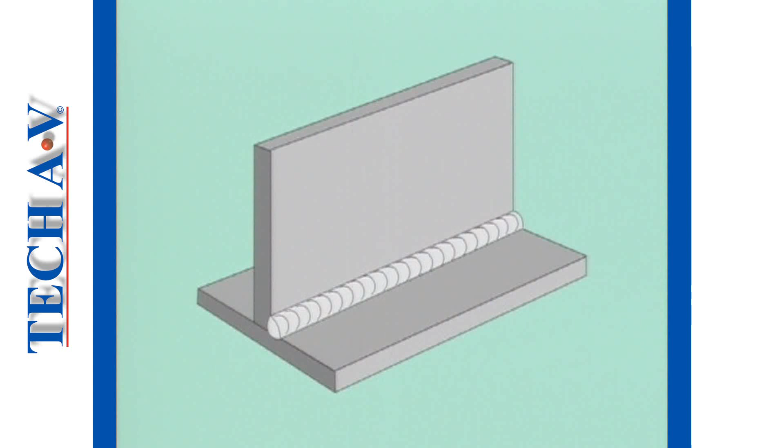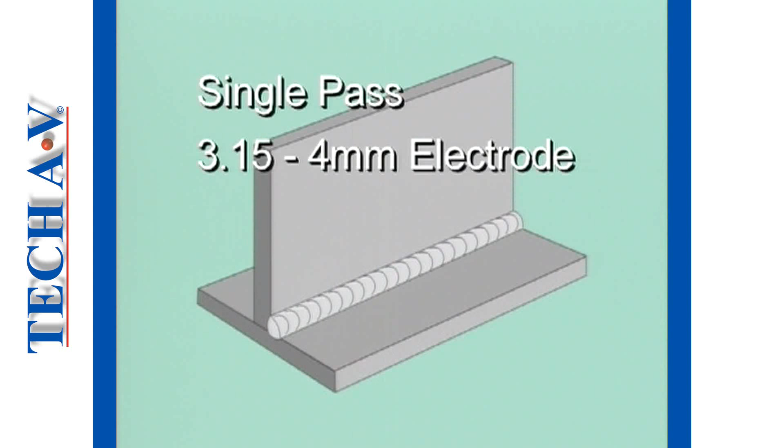In this, the final exercise, we will demonstrate and explain the process of welding a T-joint. A T-joint is made using a fillet weld technique. Owing to the metal thickness, 6 mm, we will require only one pass along the joint with a 3.15 or a 4 mm electrode. The criteria being that the weld face width must be at least 6 mm.

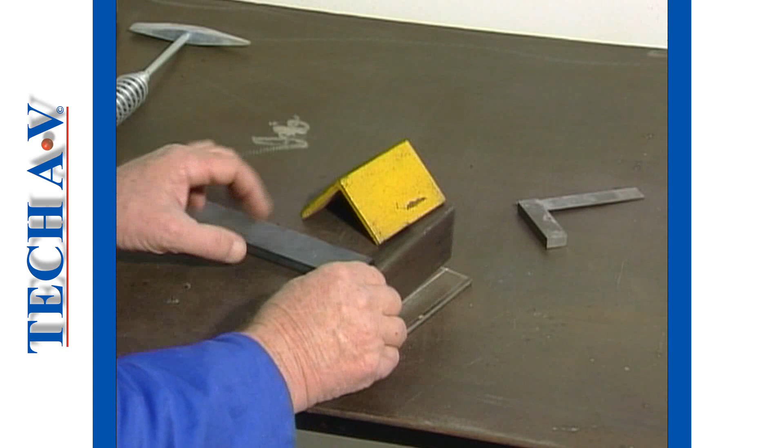The first step in our process is to set up the work and to tack the pieces into position. Any suitable method of supporting the plates may be used in order to hold them in position for the tacking procedure.

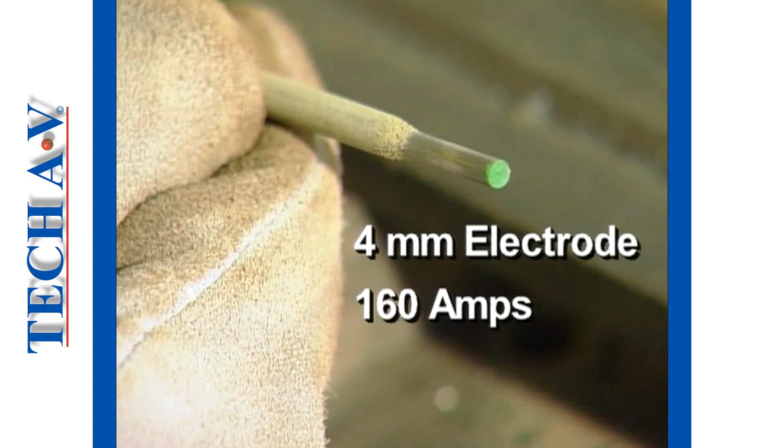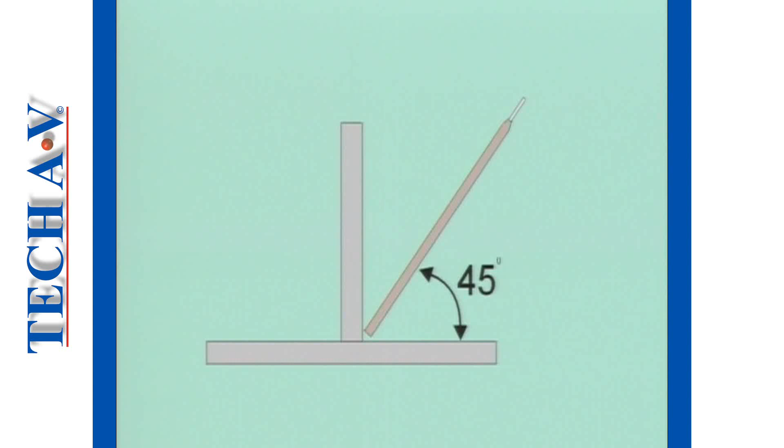For demonstration purposes, we have selected a 4 mm electrode, and the welding current required for this is 160 amps. The electrode should be introduced into the fillet at an angle of 45 degrees, as viewed from the end, and at a 45-degree angle in the direction of travel. A single tack is first made in one corner of the joint.

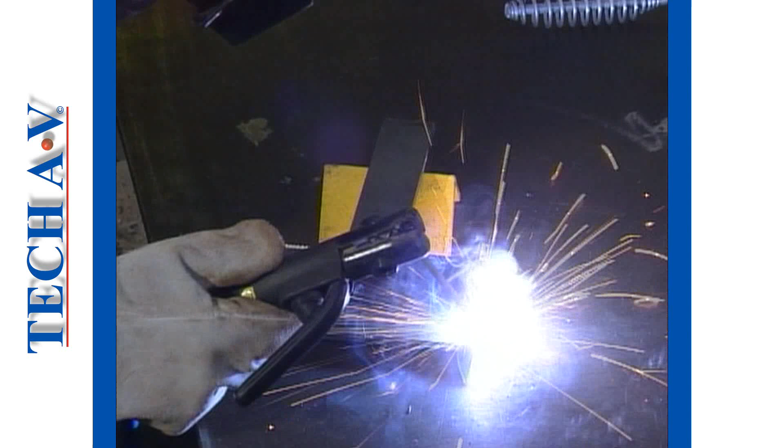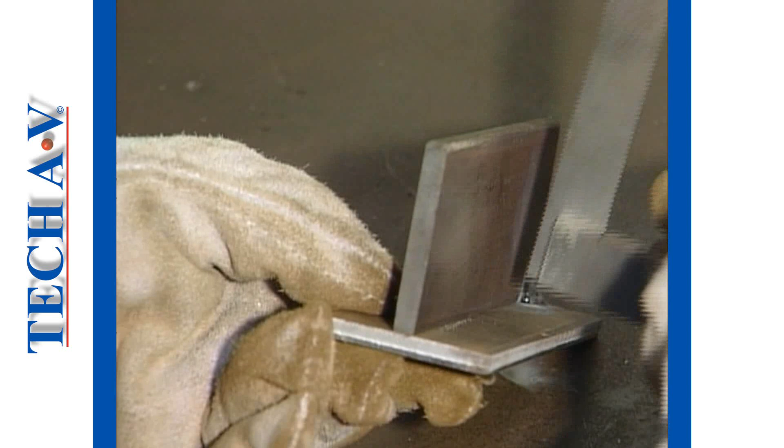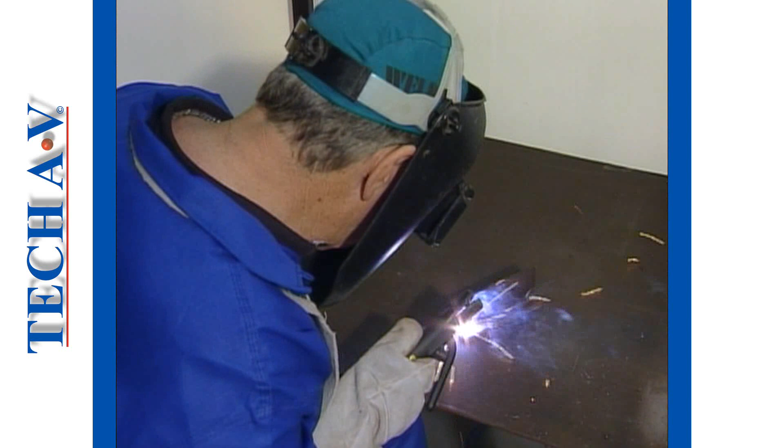Next, we must check that the upright leg is at right angles to the base, and, if not, make any necessary adjustment to bring the leg square. The second tack is made diagonally opposite the first. Thereafter, the two remaining corners are tacked. All four tacks must be thoroughly chipped and cleaned in order to remove all traces of slag.

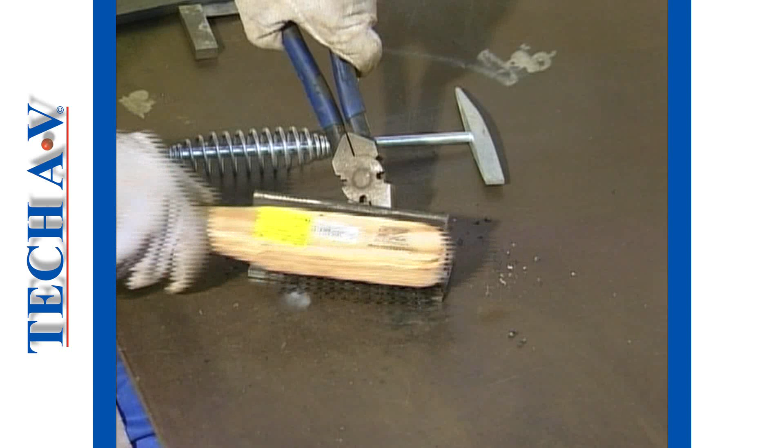For demonstration purposes, we will be welding in the vertical horizontal position, which on a large structure would be typical. However, on a small workpiece, we could just as easily rotate the work and support it in such a way that we might weld in the downhand position. In the vertical-horizontal position, welding has to be controlled carefully in order to ensure proper penetration into both plates.

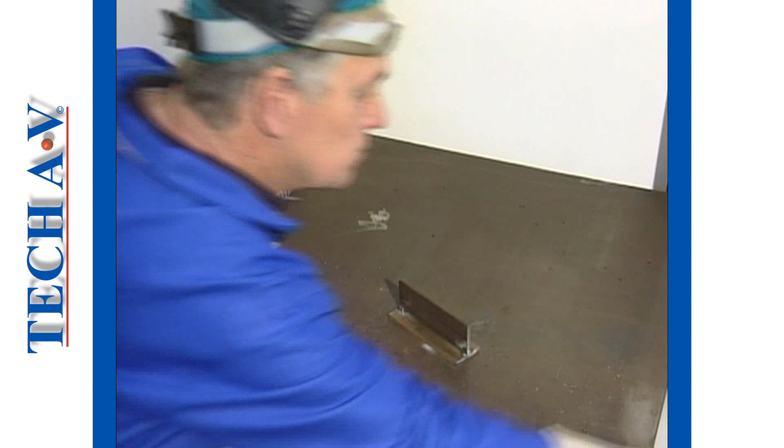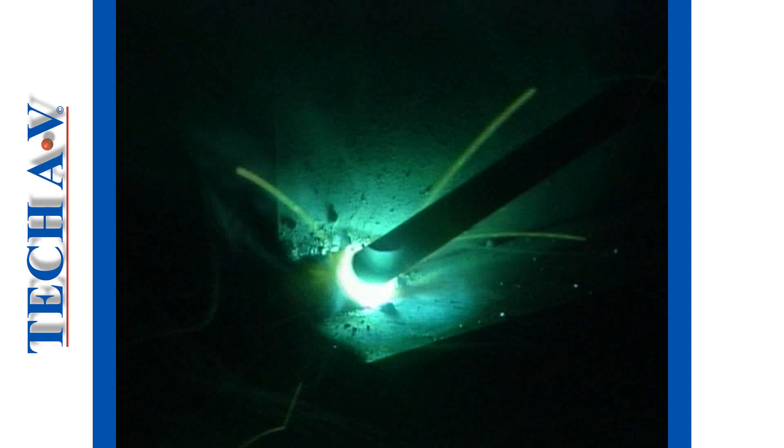The electrode should be introduced to the joint in the manner previously described, aiming the arc directly into the joint at 45 degrees. If we observe the arc, you will notice how the welder maintains a constant arc length and keeps the electrode tip fixed at the correct angle. The speed of travel is very important too. Notice how the weld pool is controlled by the combination of arc length and travel speed.

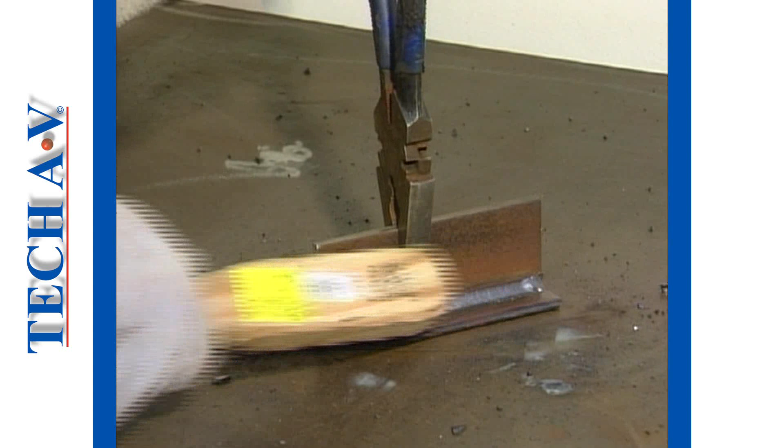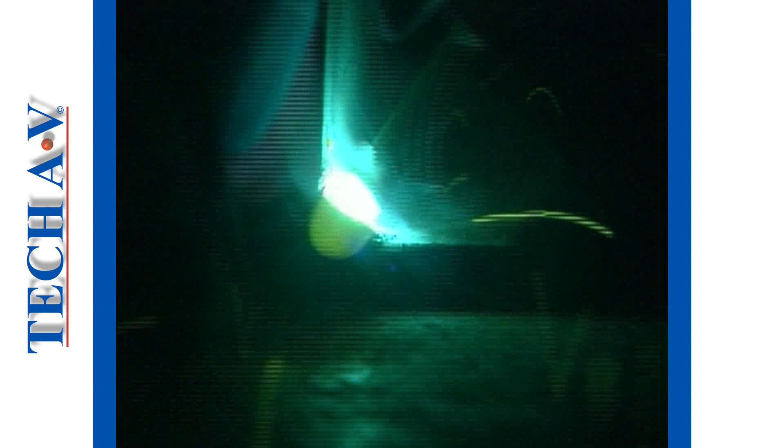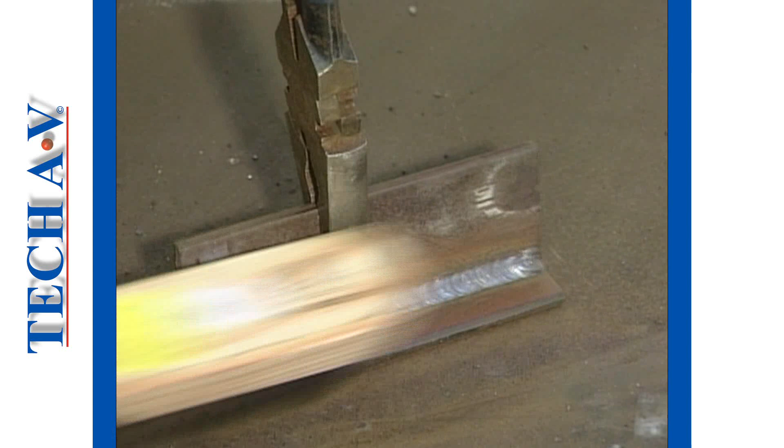At the end of the welding run, the arc is brought back onto the bead before being lifted off. The bead is chipped and cleaned so that it can be examined or read, as you learned previously. Now, all that remains is to make an identical run on the opposite side of the joint. The finished task should display beads of a uniform width, approximately 6 mm, on both sides and even penetration on both plates.

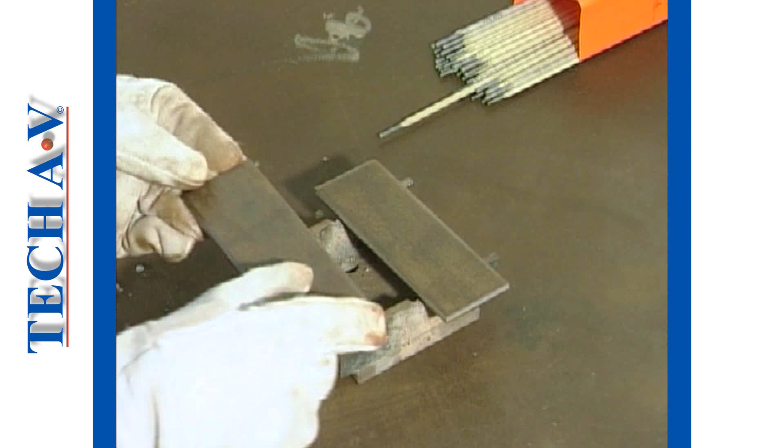This concludes the video section of Program 3. Please complete the exercise in your learner's guide to complete this module. And remember, practice makes perfect.